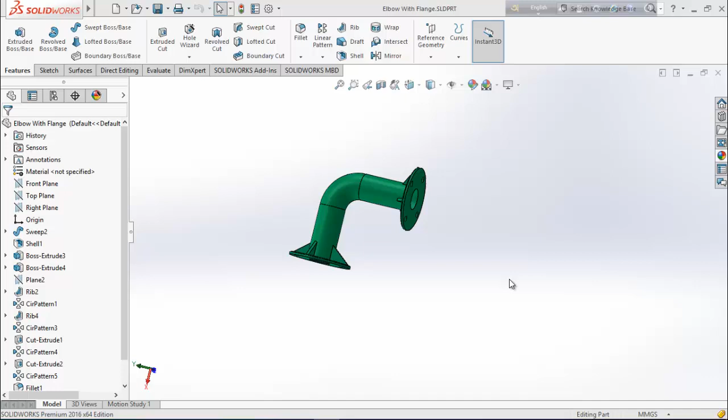At first choose front plane, make it normal and sketch. From here choose line, draw two lines and keep the dimension of this line 150 millimeter. It is also 150 millimeter.

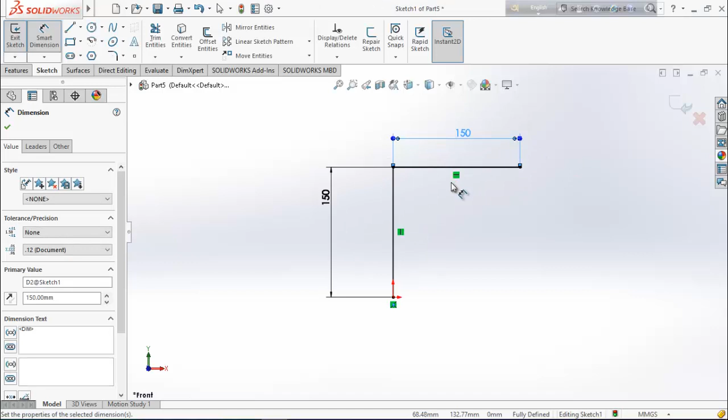Now from here choose sketch fillet and select this corner point and keep the parameter 65 millimeter. Now choose OK. Sketch out.

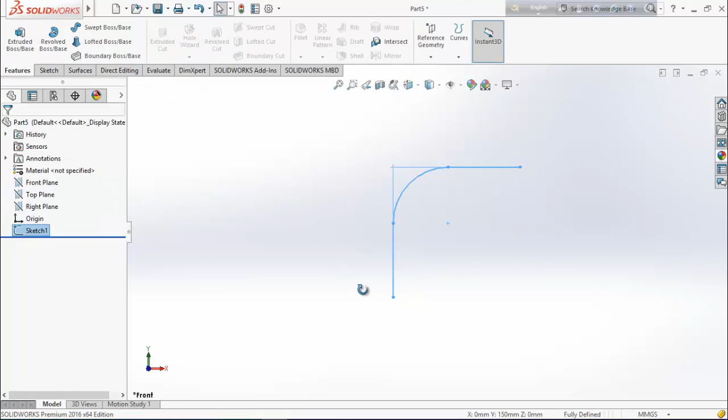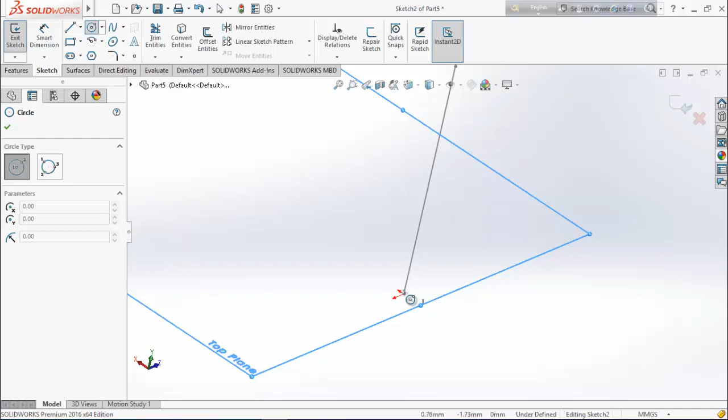Now choose the top plane and select sketch, and choose circle and draw a circle at the bottom of the line. See, it is in the origin point, so draw a circle here.

Now keep the dimension of this circle 65 millimeter. Okay.

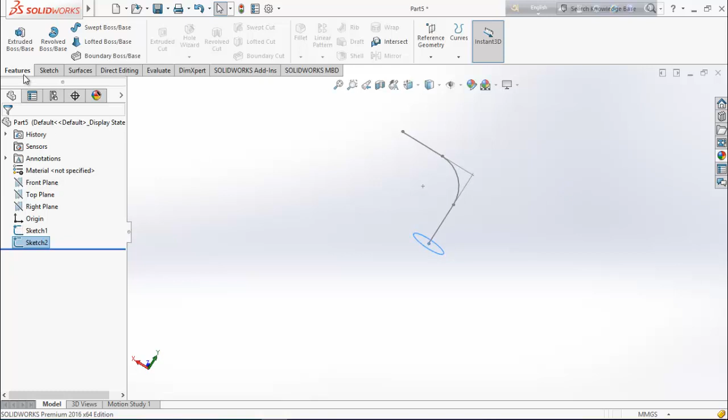Now from features choose sweep boss and base. See here the sketch 2, the circle is automatically selected here, so path, choose path and select this line.

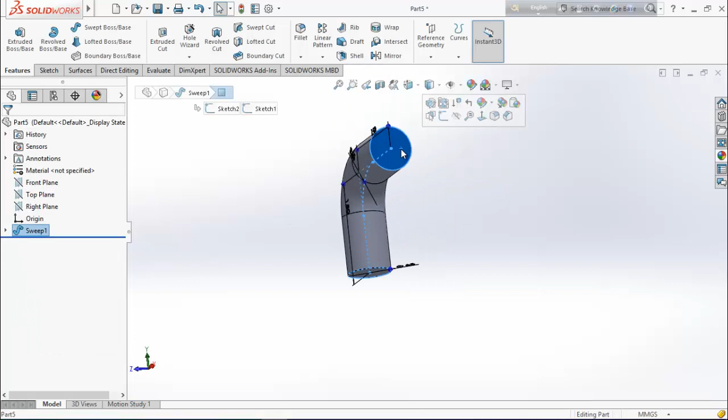Now okay, now we need to shell this face and this face, so we are going to use the shell command. From feature select shell and keep the parameters 3 millimeter and choose this face and this face. Now select OK.

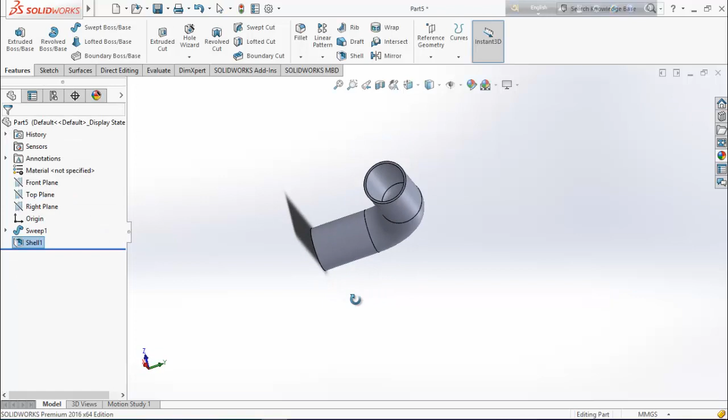Our elbow is almost ready, so right now we are going to create flange. Select this face and make it normal, sketch and draw two circles, and another one is up to this edge.

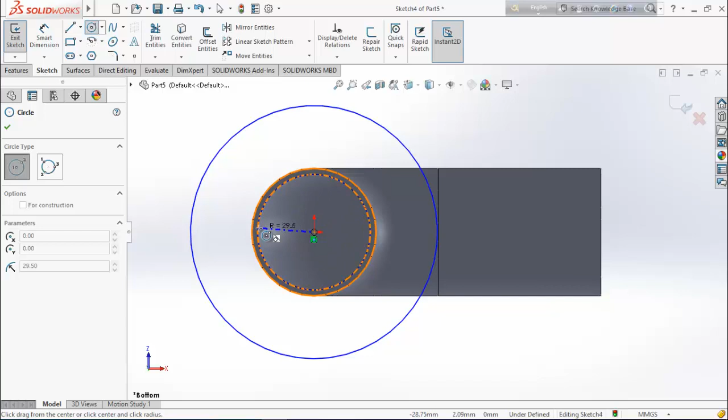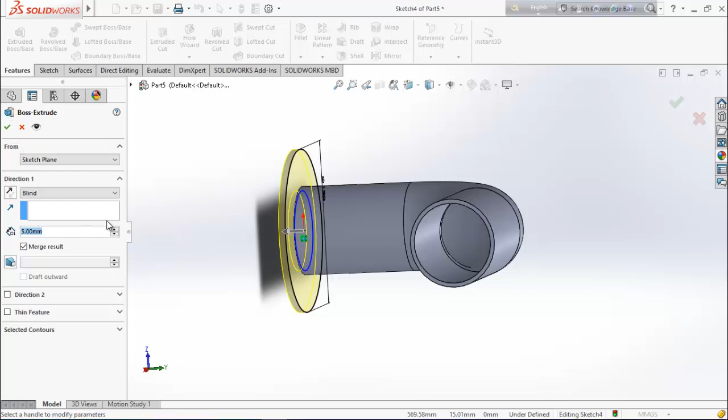Now choose smart dimension and keep the dimension of this circle 120 millimeter. Now select OK. From features choose extruded boss and base and extrude it up to 5 millimeter - no, extrude it up to 8 millimeter. Now select OK.

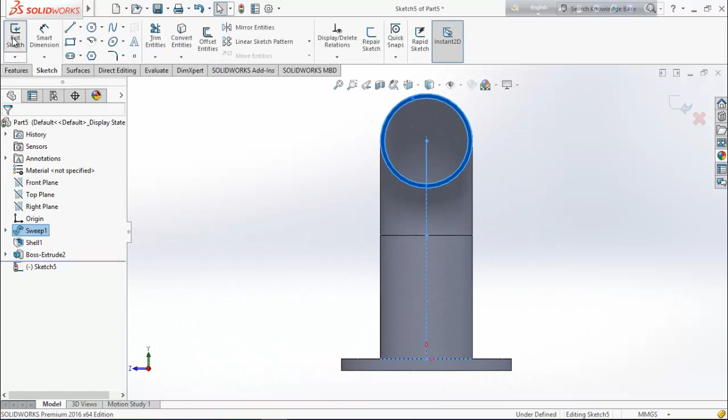The same thing we have to do here. So select this face and make it normal. From here sketch and draw two circles. One is up to this edge and...

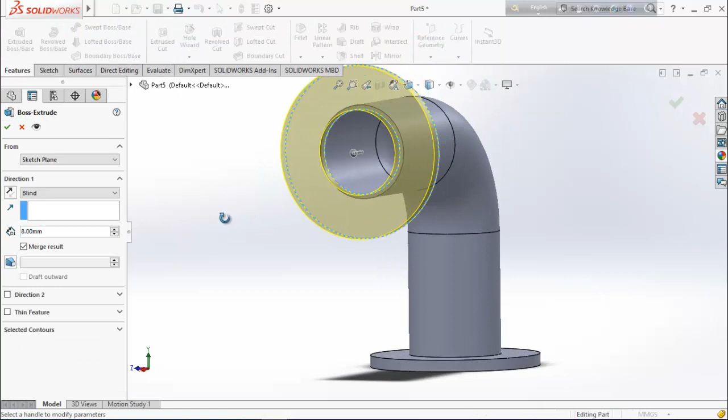another one is choose smart dimension and 120 millimeter. Okay, now again from feature extruded boss base and extrude up to 8 millimeter.

Select OK. Now we are going to make some holes, so select this face and make it normal and sketch. Select line and from here from the center point draw a vertical line and draw another line.

And keep the angular dimension of these two lines 45 degree. Keep it 54 degree.

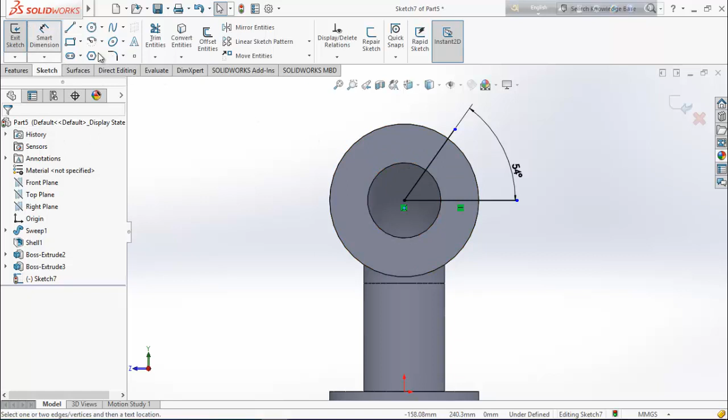Now keep the distance of this line 95 - not actually 95, 47.5. Okay. Now draw a circle here.

Choose smart dimension and keep the diameter of this circle 11 millimeter. Now select OK.

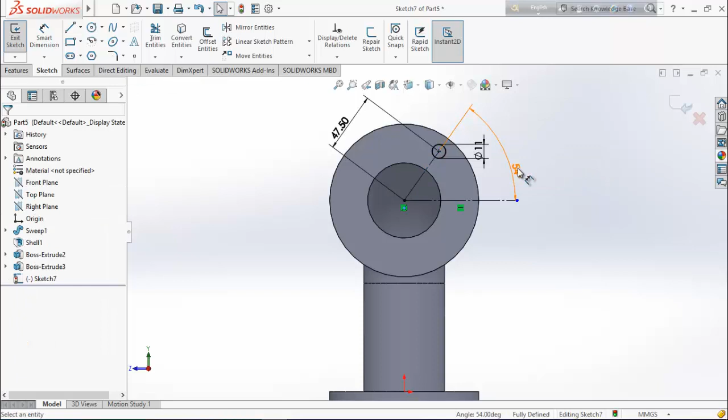And make this two lines construction geometry. Now from feature, extruded cut it up to surface, this surface.

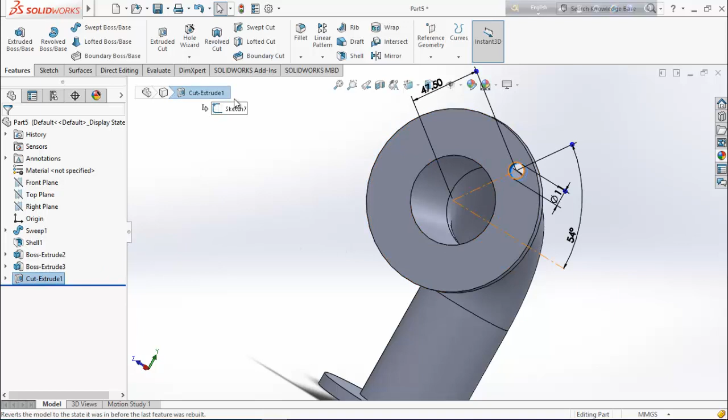Now choose OK. Now we are going to create multiple number of holes, so select extruded cut 1 and go to circular pattern, select parameter and choose this, choose this as. Okay, so 360 degree, 4 number of patterns and equal spacing.

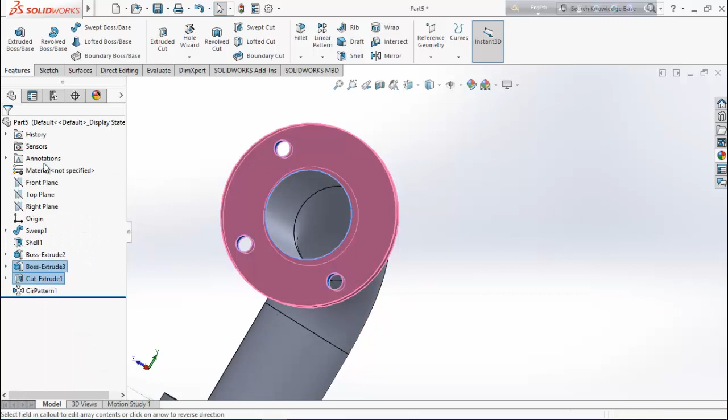Okay, sorry, again go to feature, choose extruded cut 1. Now okay, now see there are 4 number of holes, so again...

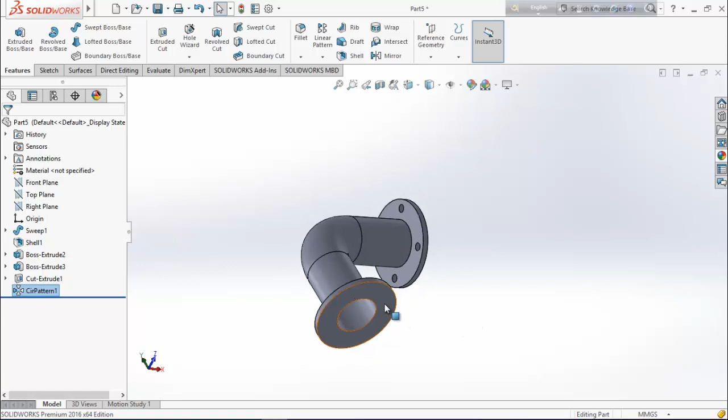select this face, make it normal, sketch, draw 2 lines. And keep the angular dimension of these two lines 54 degree. Select OK.

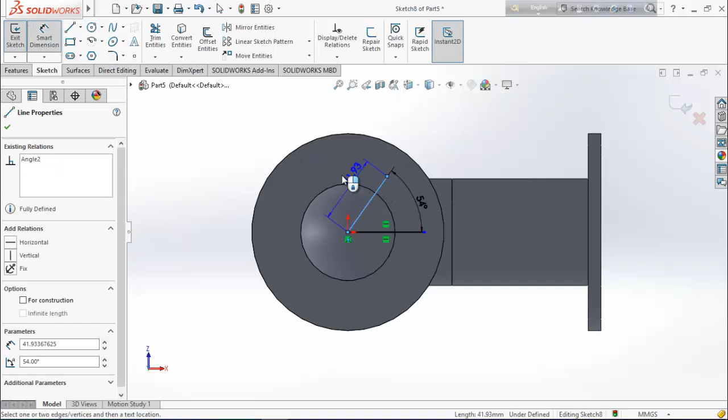Again choose smart dimension and keep the length of this line 47.5 millimeter. Okay, now draw a circle here...

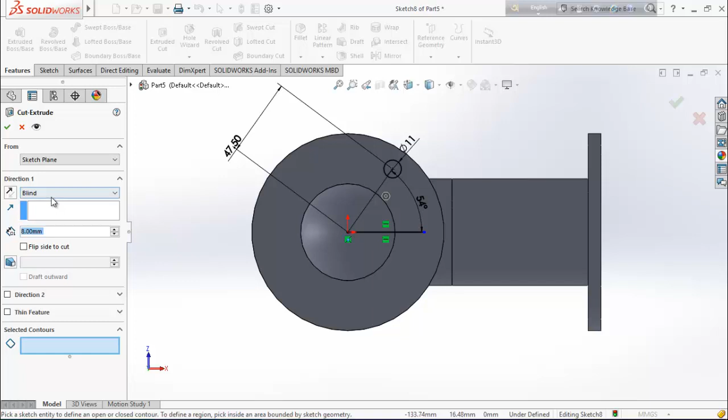and keep the diameter of this circle 11 millimeter. Okay, now again from feature, extruded cut, blind up to next. Okay.

Now select cut extruded 2 and again go to circular pattern, select parameter and choose this as - see 4 number of instances, equal spacing and 360 degree. Okay.

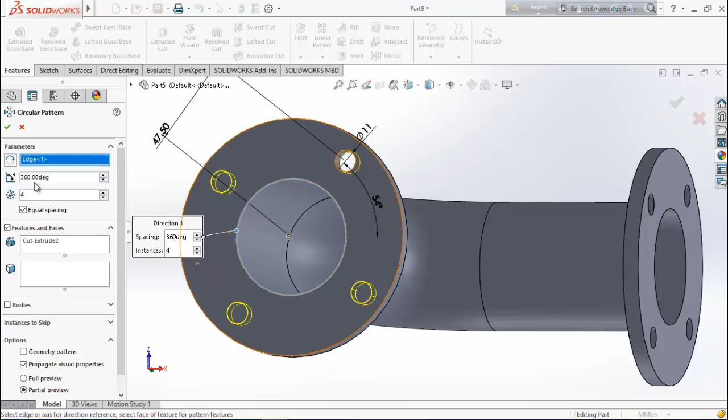Now we are going to create some rib. So again choose front plane and go to reference geometry, select plane and create a plane over the front plane.

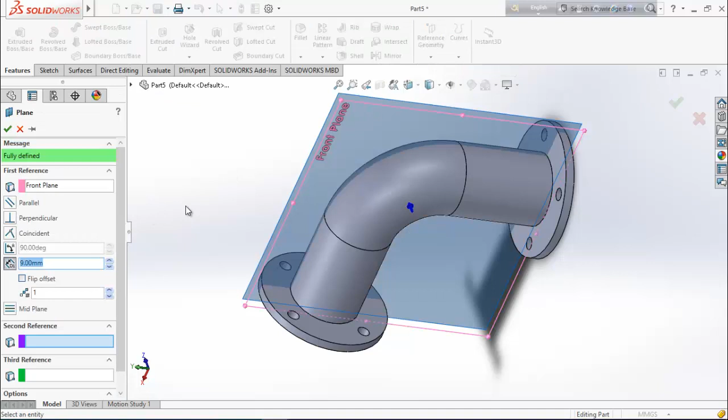So keep the distance 9 millimeter. Okay, now select this plane and sketch. Okay, make it normal and now choose line and from here draw a line.

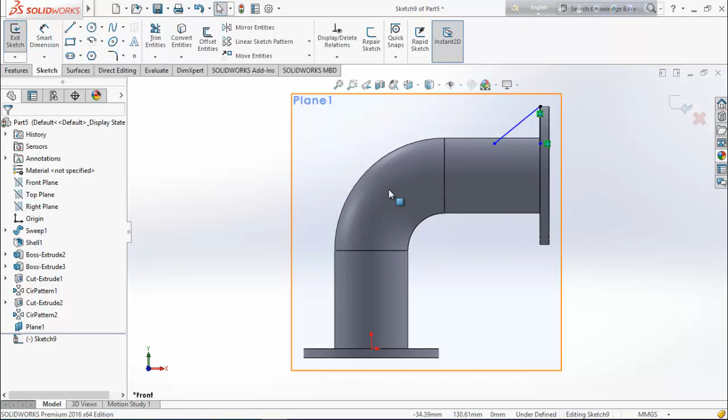Again from here it will be perpendicular. Okay, now from feature, select rib, choose 5 millimeter - not actually 5 millimeter, 7 millimeter.

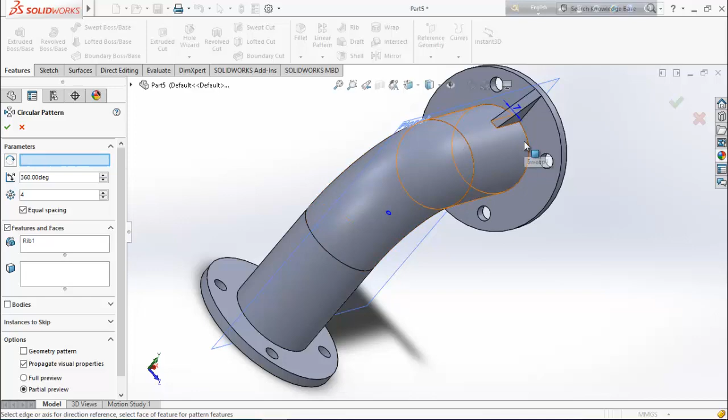Choose rib and again go to circular pattern and choose parameter, select this - we want 4 number of parameters, equal spacing. Okay, now see our rib is also ready, it's looking nice.

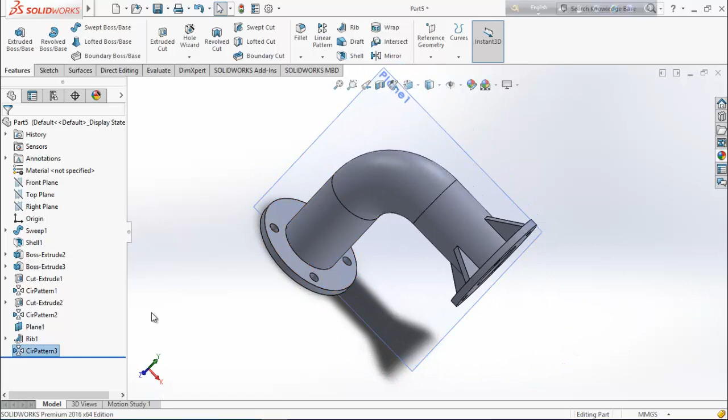And again choose this plane, normal, sketch, again choose line, okay, same thing.

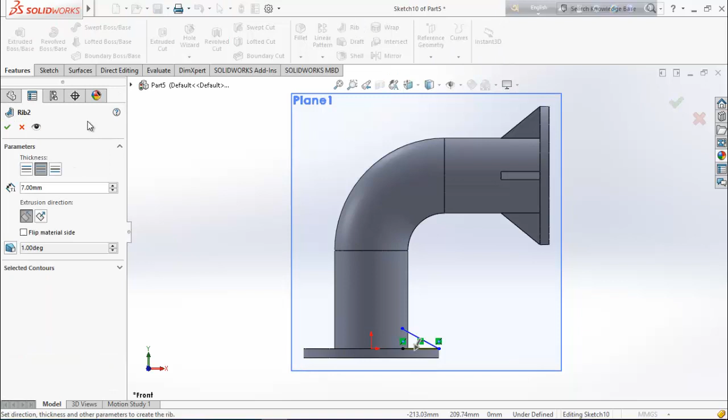Now from feature, rib, 7mm, okay, see, choose rib 2 and from here choose circular pattern, select parameters and select this as 4 number of parameters, 360 degree and equal spacing. Okay.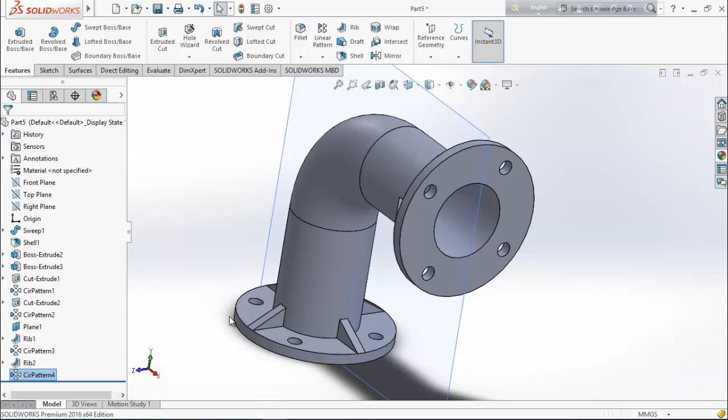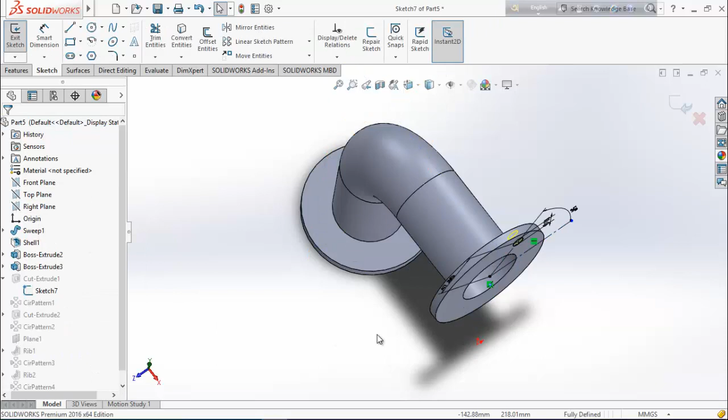Now see that our extruded cut hole is not at the middle point of these two ribs, so we need some modification. So from here, extruded cut 1, go to sketch and from here choose smart dimension and keep the angular dimension of these two lines 45 degree, choose okay. Now sketch out.

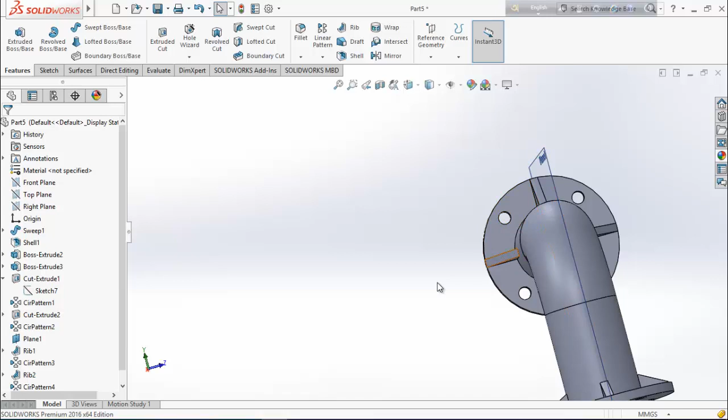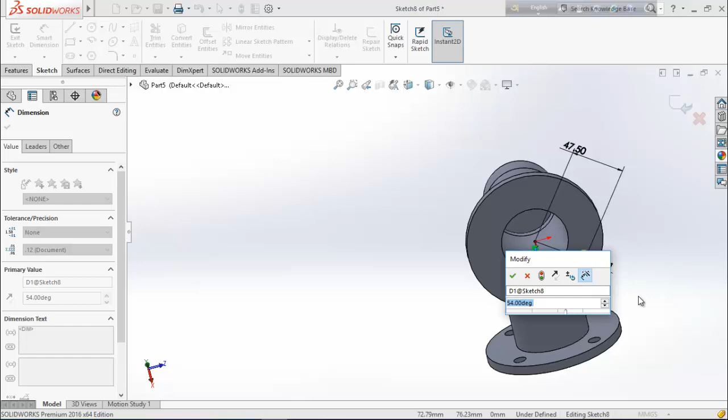See, now the extruded cut hole is at the middle point of these two ribs. Again do it for this flange, so choose extruded cut 2 and select sketch and edit sketch. Again choose smart dimension and keep the dimension of these two lines 45 degree, select okay. Yeah, now it is perfect.

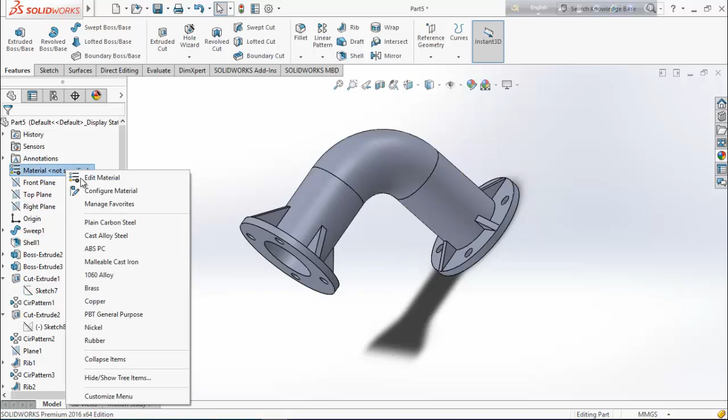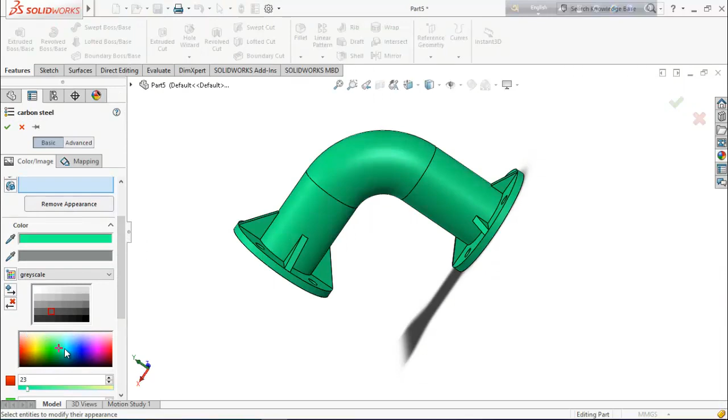So hide this plane and now define some material, make it plain carbon steel, apply, close, make it plain white, select here some color. Okay.

Now see our elbow with flange and rib is almost done.